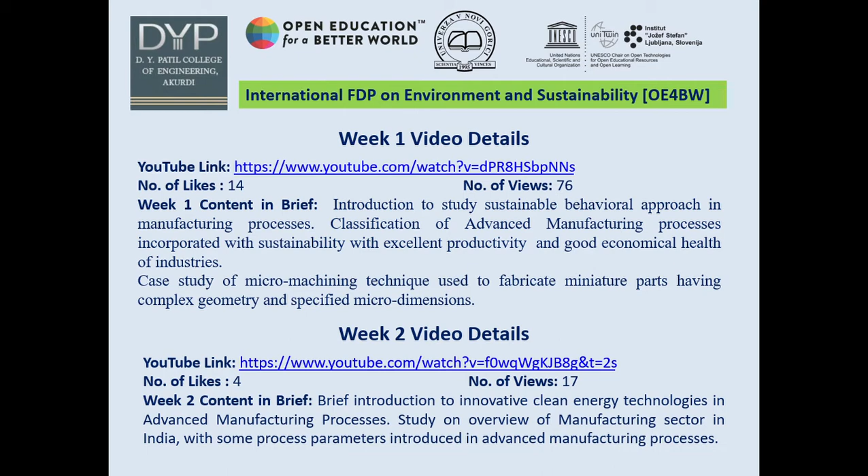Now, let us see the video outcomes that were completed in the week 1 and week 2 assignment section. After learning through these videos, the students will be able to study and classify advanced machining processes approaching sustainable manufacturing development. Also, students will be able to understand the current scenario of the manufacturing sector all over the globe and in India also.

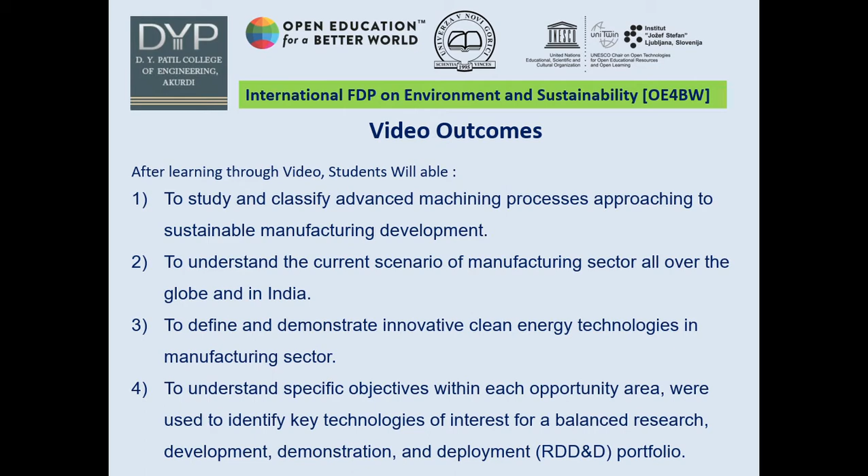To define and demonstrate innovative clean energy technologies in the manufacturing sector, and to understand specific objectives within each opportunity area that were used to identify key technologies of interest for a balanced research, development, demonstration and deployment portfolio, that is the RDD&D portfolio.

Now let us move further into the introduction part of sustainable advanced manufacturing processes. As we know, manufacturing technologies offer plenty of opportunities to improve sustainability by reducing environmental impact or by the more efficient use of resources. Some possible improvements in sustainability are related to processes, machines, or the overall system. Also, to realize the idea of green manufacturing, all production technologies have to be examined with respect to their possible contribution to improved sustainability.

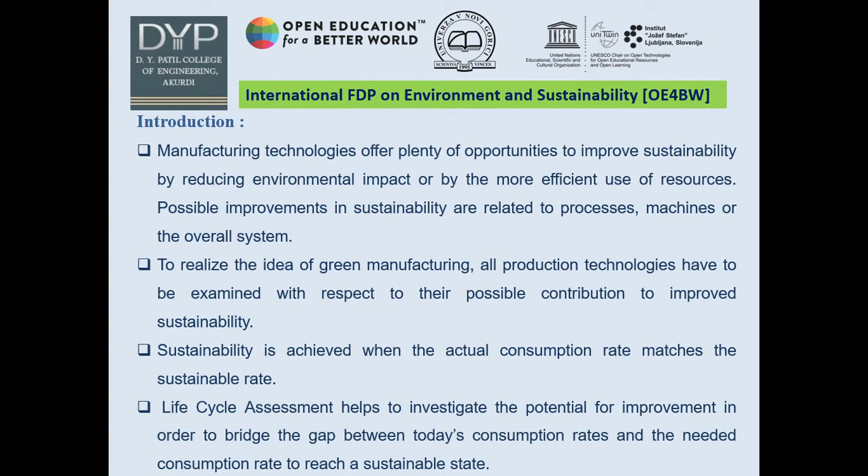Sustainability is achieved when the actual consumption rate matches the sustainable rate. And for that, a life cycle assessment needs to be done, which helps to investigate the potential for improvement in order to bridge the gap between today's consumption rates and the needed consumption rate to reach a sustainable state.

Sustainability in ultra precision and micro machining. Mativenga defined micro machining as a manufacturing technology that involves the use of mechanical micro tools with geometrically defined cutting edges in the subtractive fabrication of devices or features with at least some of their dimensions in the micrometer range, that is 1 to 999 micrometers.

Also, Brinksmeier has defined ultra precision machining as a machining process whose accuracy has been driven to its ultimate technological limits irrespective of the nature of the process and the size of the workpiece, that is micro, macro or nanoscopic level. So ultra precision processes allow us to achieve surface roughness down to the nanometer scale and are applied, for example, to manufacture optical components. Micromachining processes, on the other hand, are adequate technologies to manufacture microcomponents, microfeatures, and microstructures.

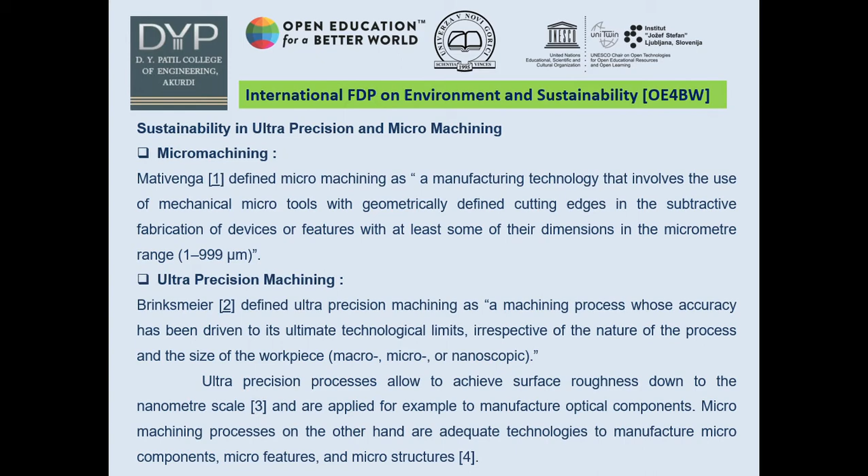Now, what are the sustainability aspects in ultra precision and micromachining? A suitable way to study the sustainability of a manufacturing process is life cycle inventory analysis. Based on the procedure proposed by Linke to investigate grinding, the input-output quantities of ultra precision and micromachining are defined as shown in the figure. At the center we see the ultra precision and micromachining processes, parameters, and chip formation or the cutting forces occurring at the time of machining.

Those are incorporated with non-product material, product material, energy forces, and the workers, with their health and education, then the machine with its life cycle and power, and whatever waste comes out of that, such as solid waste, dirty cooling lubricant, emissions, tool wear, or heat. All these parameters are incorporated when we look at the sustainability aspects in ultra precision and micro machining.

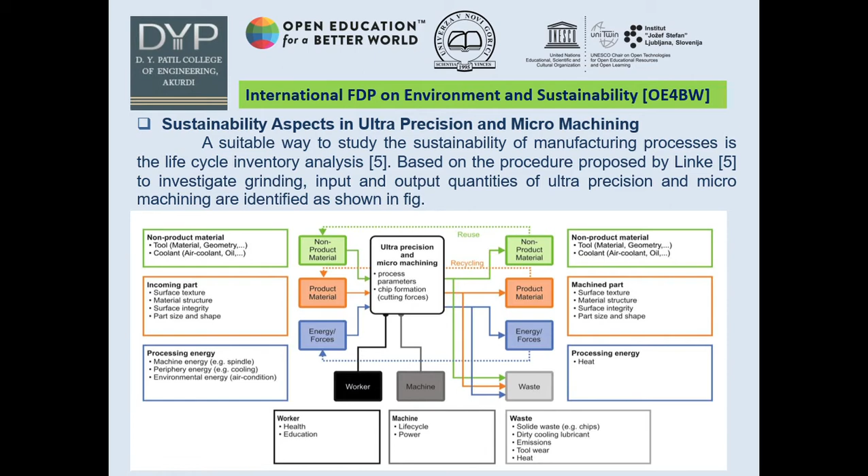Now, this is a diagram which shows the component size and accuracy in micro machining and ultra precision cutting. On the x-axis, we define the surface roughness with geometrical error, whereas on the y-axis, we show the component size. As the component size goes up to the ultra precision level, the surface roughness approaches near zero.

And we obtain micro machining with the minimum component size, so when we combine both these machining processes, that is ultra precision cutting and micro machining, we come to know the exact fabrication at the micro level, that is micro fabrication technology. So for optical components, we are going to discuss these ultra precision cutting machining processes with microprocesses.

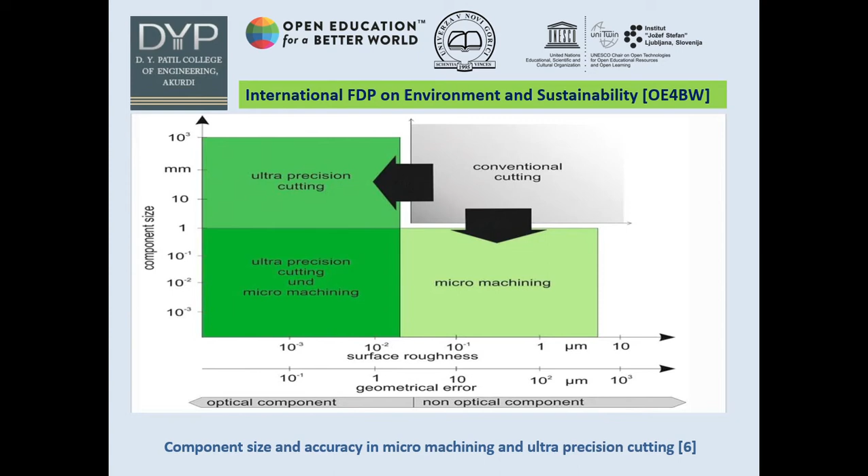So to carry out all these ultra precision cutting as well as micro machining processes, we have to continue with green manufacturing technology wedges. The green manufacturing technology wedges include efficiency improvements, carbon capture and storage from power plants, and renewable power, etc. As we see in the figure, that is the concept of technology wedges.

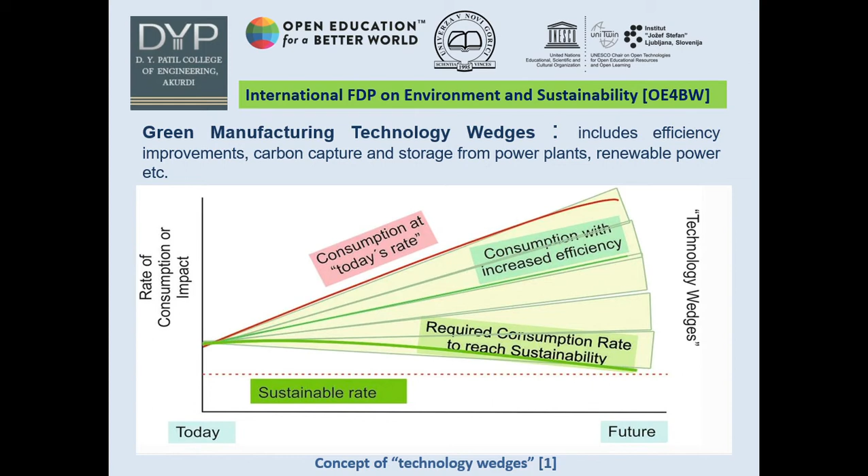Where are we today and where will we be in future? As and when we are going to adopt some technology in our manufacturing process, the consumption rate is going to increase day by day in future. But at the same time, the consumption with increased efficiency is going to be lowered down. That means efficiency is going to increase, but the consumption of energy is going to decrease. That is the impact of green manufacturing technology with these wedges.

Now here I'm going to discuss some ISO, IEEE standards or industrial norms with their applications. What we have studied earlier in innovative clean energy technologies and in sustainable manufacturing processes, there are some important industrial standards of the organization, that is ISO, or International Organization for Standardization.

They are defined as, the first one is ISO/TC 184. The main domain for this international standard is automation system and integration, and that can be used in the area of robotics, CAD/CAM, and manufacturing processes.

Second international standard that is discussed for sustainable advanced manufacturing process is ISO TC 261. The domain area for this utilization of ISO is additive manufacturing, with various additive manufacturing process terms and definitions, process chains that may be hardware and software, test procedures, quality parameters, supply agreements, and all kinds of fundamentals discussed under this ISO TC 261.

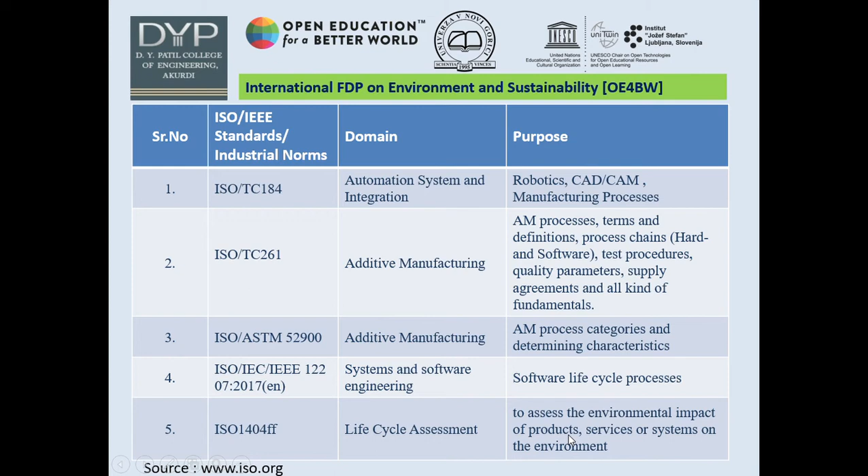And last but not least, ISO 14044, that is used in life cycle assessment format to assess the environmental impact of products, services, or systems on the environment.

Now, how the carbon emission accounting is carried out in sustainable advanced manufacturing process, that we need to learn. As a case study, I have given one example. First we will discuss what is carbon emission accounting.

It is an important assessment method for sustainable manufacturing, which mainly focuses on raw material, energy, and waste disposal factors, but ignores labor and capital factors. However, the generation process of labor and capital inevitably produces carbon dioxide emissions, so the carbon footprint method is used to evaluate these carbon dioxide emissions of the manufacturing process, which is historically defined as the total set of greenhouse gas emissions caused by an organization, event, product, or person.

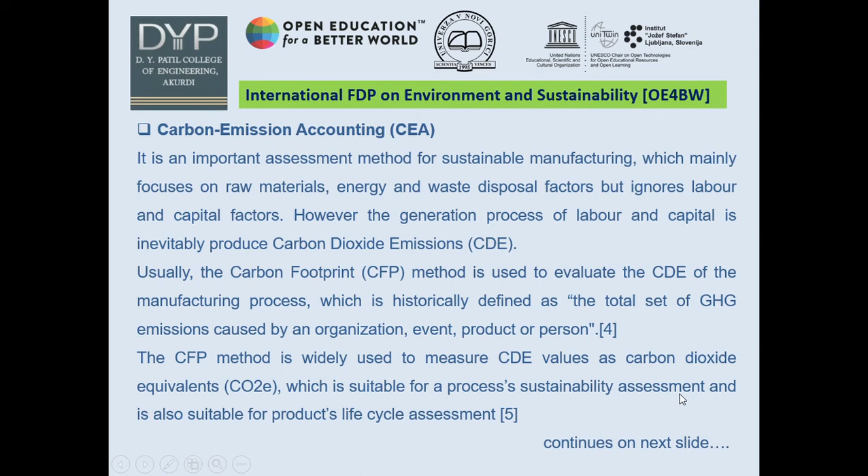Now, the carbon footprint method is widely used to measure carbon dioxide emission values as carbon dioxide equivalents, which is suitable for process sustainability assessment and is also suitable for product life cycle assessment.

Now, the extension of the carbon emission accounting method is based on the CFP approach, that means carbon footprint approach, but it's extended. In the extended carbon emission accounting method, the labor, capital, raw material, energy, and environmental inputs are calculated as extended carbon dioxide emissions, that is EXCDE.

For that, we first have to define the production indicators which are producing the carbon in manufacturing. So the production indicators in case of manufacturing process are labor, capital, material, energy, and environment. Labor is defined by capital letter L, capital is defined by capital K, material by capital M, energy by capital E, and environment by capital O.

When they pass through the production plants or different production processes, and when we produce the final product in an efficient way, then we can find out the carbon emission with these production indicators. That means the carbon emission with respect to time is a function of labor, capital, material, energy, environment, product, and the efficient way of producing the product in a given time.

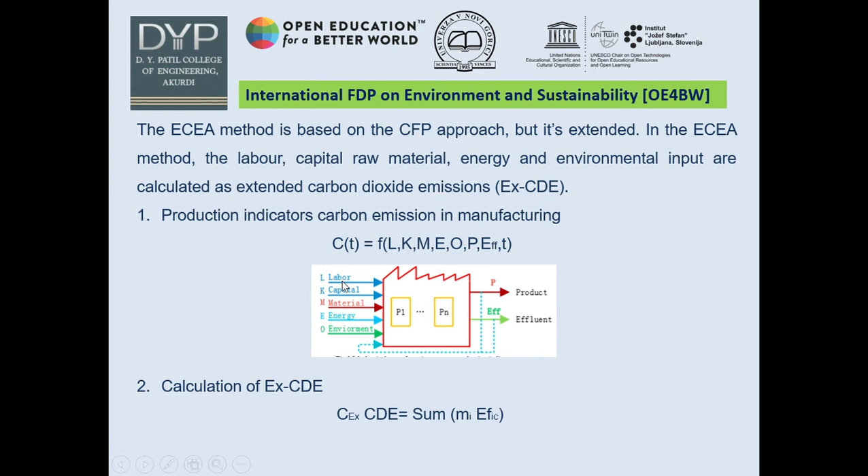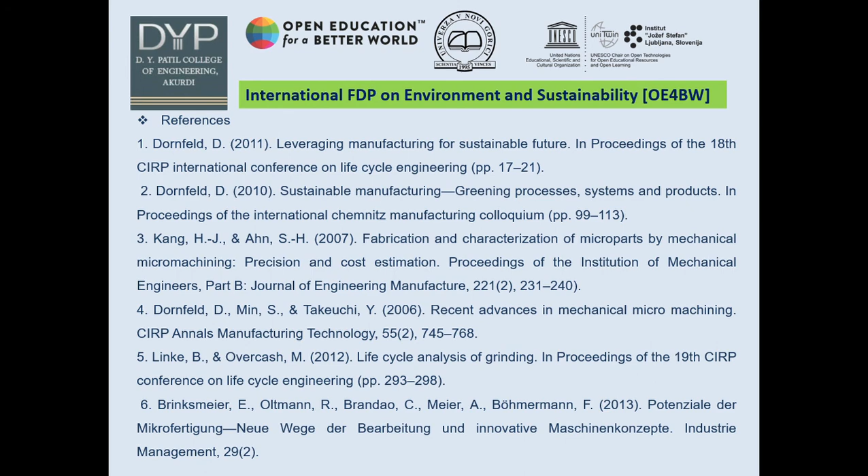So with the help of production indicators in carbon emissions, we can calculate the extended carbon dioxide emission as the sum of MI into EFI, where MI is the total of production indicators into efficiency that we define for that particular component. For this, I have referred to a few journals or research papers that I found on various websites. With this, I am going to conclude my session on sustainable advanced manufacturing process.